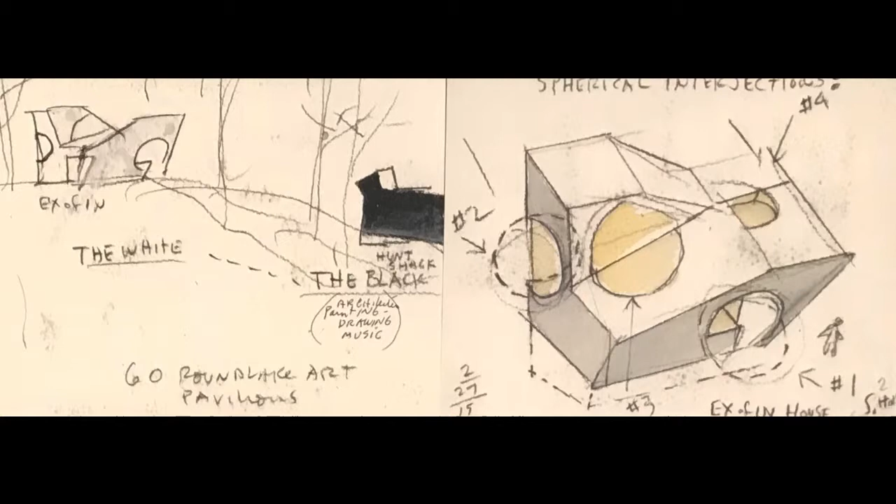So the very first thing we did was hire Robert Kelly, the great poet, to write a poem. And I would just want to read an excerpt.

What we do with land, what we can do, map these acres on the sky, to offer this land to heaven and see what comes. This thing wants art. What is art? Art is doing for the first time what was never done. Art is the completion of the unbegun. So leave it to a man who builds a house to try to put the sky right on the ground.

The explorations of In Project began with working on issues of abstraction and space. We're discovering links between architecture and neuroscience that we never knew about before. One of the really interesting things is how we need abstraction.

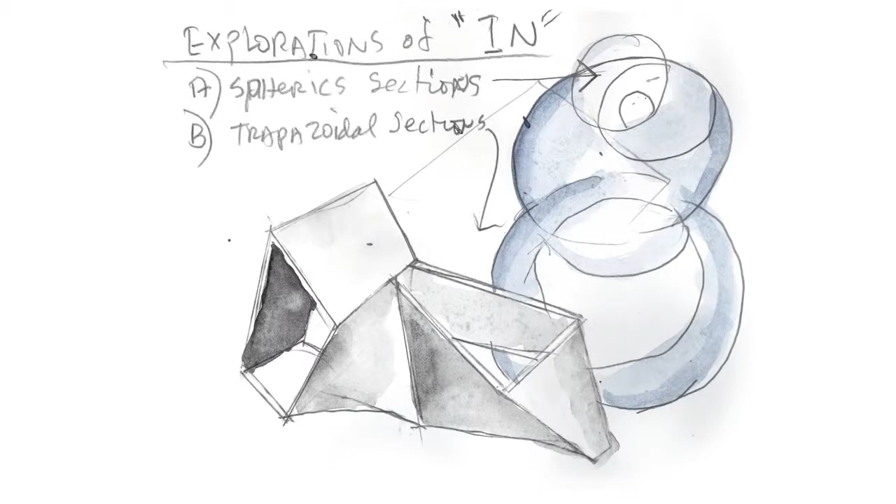The explorations of In started with Venn diagrams, a number of permutations that were all done in drawings first, and then we did some 3D printed models. The Venn diagram of spheres intersecting spheres became one of the most interesting things. So this particular model we decided to take further. Then we said, okay, this is more of an object, now let's do the reverse. So this is a negative, and then we decided to get more parallel walking surfaces.

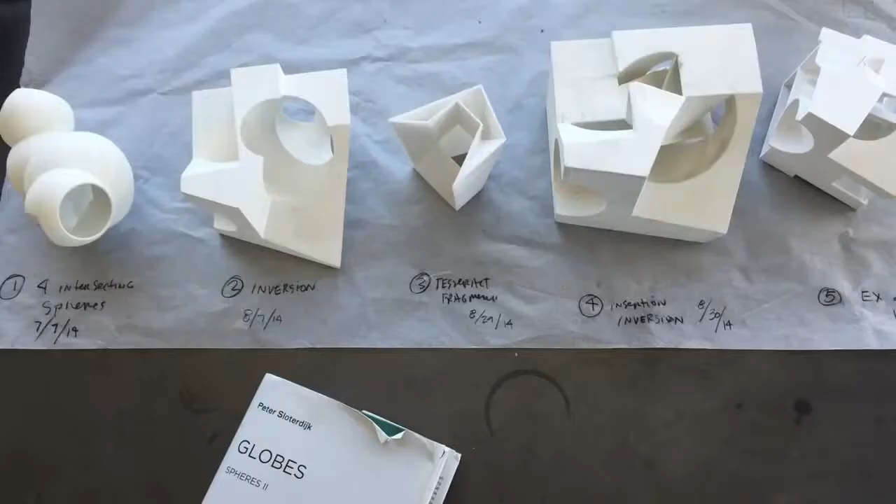We would insert a partial tesseract, a fragment of a tesseract inserted into the reversal of the four intersecting spheres. But at a certain point, this object became curiously like a small house, and we decided to make it into a guest house.

When we were completing our studies of the explorations of In, a certain coincidence happened, and that is this 28-acre piece of land, which is all forested with rock outcroppings, was up for sale. It was slated to be a 5-house subdivision. And suddenly, we have a place to put this experiment, at the same time saving all this land as a reserve.

This house stands for the old argument of form versus content. I say program, just like Lou Kahn said, is just so many bananas. You work with your spatial idea, the inspiration, the spatial excitement, and you find how the functions work. And when you sell a house out here in the Dutchess County area, they go, how many bedrooms does it have? This house has 0 bedrooms, but it sleeps 5.

So where do you put the kitchen? Well, the kitchen just happens to fall between the 2 shifting layers of the house. So that's the kitchen. And there's plenty of privacy in the various places you can sleep. And besides, you can sleep on top of the sphere. The kids who have slept up there say that that's the magic mountain and it changes their life, right? Everything works out as a purpose.